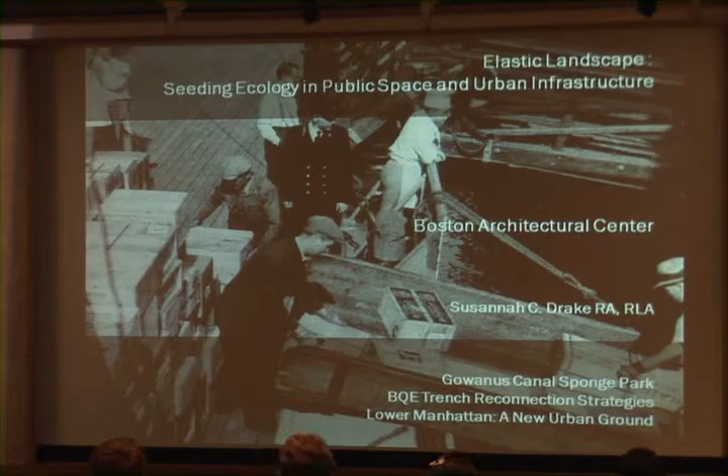So my talk today, as you said, is called Elastic Landscape, Seeding Ecology in Public Space and Urban Infrastructure. And it will be an overview of some concepts and then a focused exploration of three projects that we're working on or have worked on in the office. So really, we're looking at how cities that were designed for exchange need to change in their morphology, or in the morphology of the edge, now, given that trade is no longer happening in the same way along that edge.

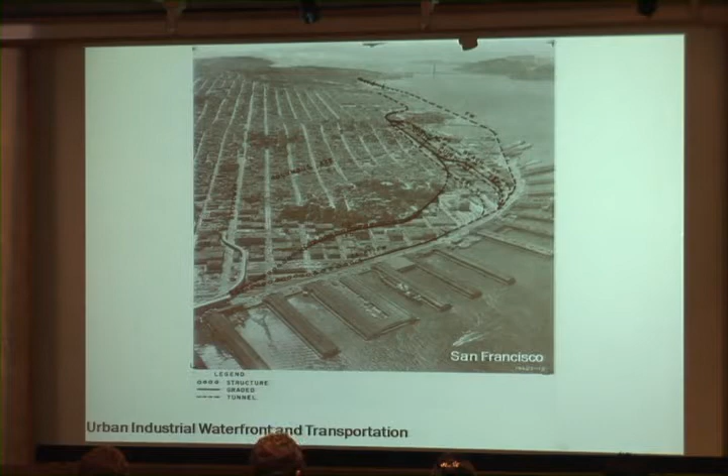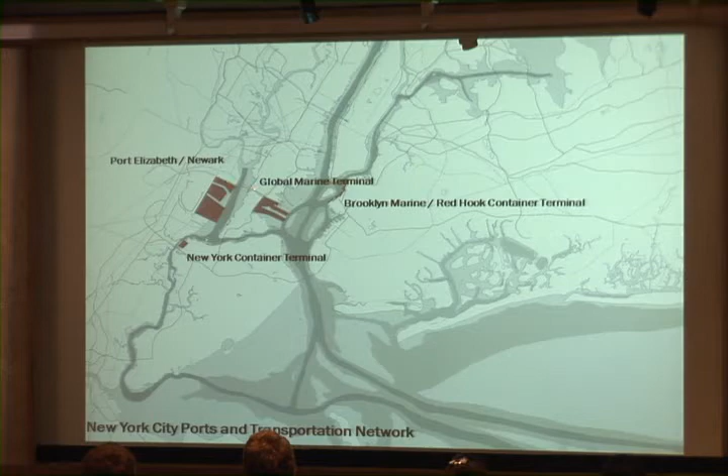With the move to containerized shipping, the need for storage space and space for gantry cranes and need for transportation, really the idea of having shipping happen in urban centers is no longer a reality. And so there's actually a potential opportunity for the use of this space that used to be used as this place of exchange of goods. So in New York City, you can see the potential impact, where it used to be that this exchange was happening all along the edges of Manhattan and Brooklyn, and now the shipping ports are actually out in New Jersey, with a little bit still happening within the city limits.

So ecological systems exist at a very broad scale in space and time, and the impact of urbanization looks pretty light from this perspective. But when you zoom in to the tighter urban scale, you can see that we've had a tremendous impact on the natural environment. And so my work is actually starting to think about how we might improve these situations.

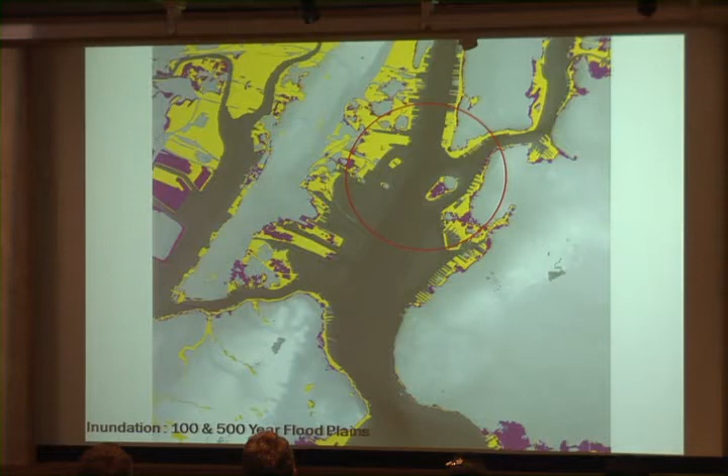So it's interesting to look at the shoreline or the historic water, actually really sort of wetland patterns of New York City, and then also start to compare those to some of the flood projection inundation zones that are suggested with sea level rise and climate change issues.

One of the things that has happened with this industrial development is that we've created these hardened edges, and we've also created these sewer outfalls from the upland areas. And you can see with some of the sea level rise projections that some of these sewer outfalls are actually going to be below extreme high tide levels, and that this hard edge really has to take the full force of a wave that's coming in. So there's no space for it to dissipate on the edge of the city.

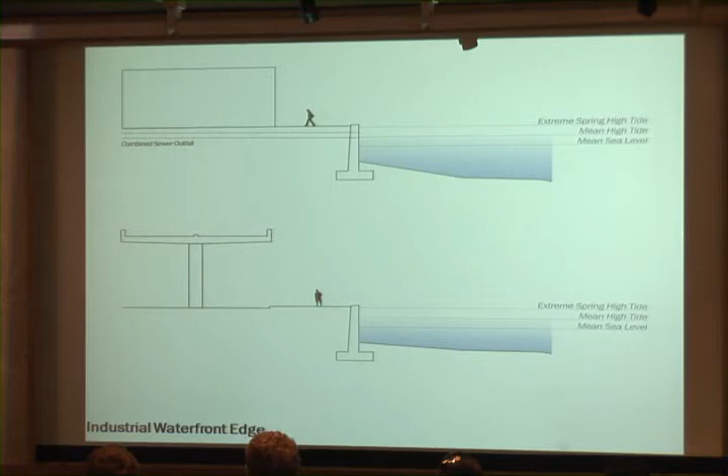So in an ecological condition, you really have a broad expanse of land that can absorb that force and also can absorb the water, right? So the plants are going to absorb it, but then also the angled cross section takes the action out of the wave, right? So that the force isn't going to hit the city as hard.

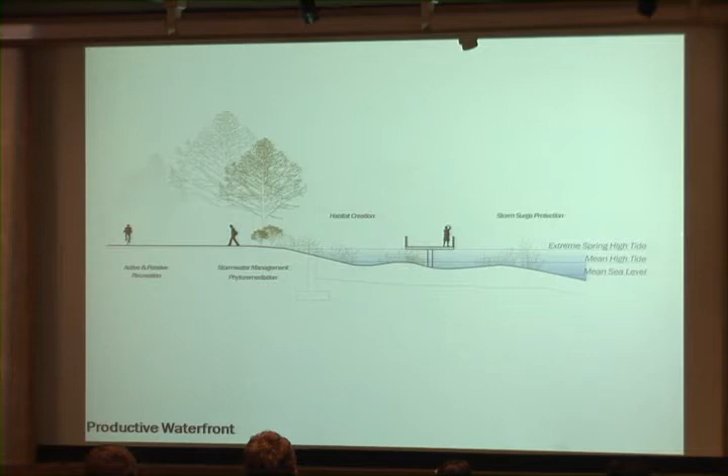So what we're proposing, this is a pretty simple example, but an idea of how we might add passive and active recreation that can absorb some of those forces. Maybe in some places we create places where you can actually get out over the water, but really a sort of thicker edge at that margin. So with that in mind, I want to talk about a couple of projects.

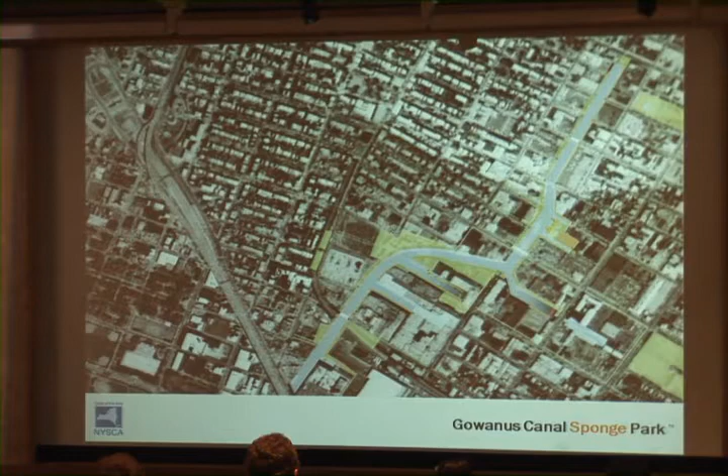This is the Gowanus Canal Sponge Park. We were asked by the Gowanus Canal Conservancy to come up with an open space system around the Gowanus Canal, and it's an old industrial neighborhood, and we knew that we were backed by the Gowanus Canal Conservancy, and that we were going to be doing lots of community presentations. We needed lots of community buy-in.

So we thought, well, how are we going to convince a community group that they should put a lot of swamps in their neighborhood? Or wetlands. And so we thought, well, wetlands act like sponges to absorb the water. So why don't we call it a sponge park? And that idea was born.

Now, part of the motivation for doing this is that New York has a combined sewer system. And in dry weather, the sewage from domestic and commercial sources just goes into the sewage treatment plants. But when you have even a 1/20th of an inch of rain, the sanitary sewage combines with the stormwater, and you get these overflows into the harbor.

And on average, we have about 400 million gallons of this combined effluent going into the harbor every week. So it's a very big problem. And the Department of Environmental Protection is actually getting fined by the EPA because of Clean Water Act issues in relation to this. So they're actually on the case and doing a lot of work to add these green infrastructure systems to the city. And that work, I think, has happened in part because of some of these projects, mine and work by other landscape architects in the city.

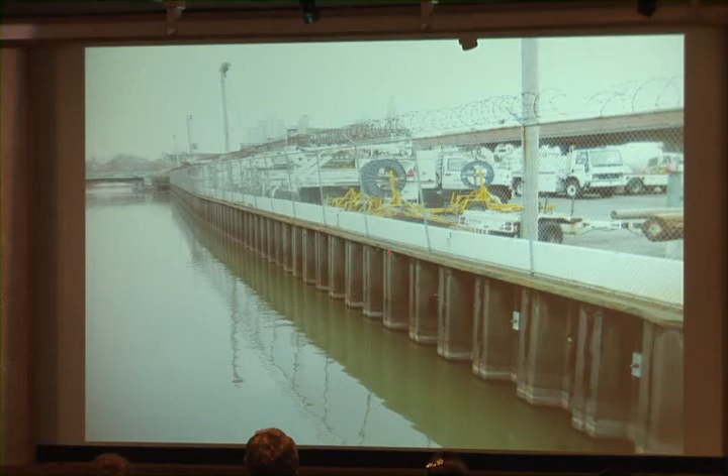So the Gowanus Canal can be a very beautiful water body, as you can see, although this is a baffle to hold back some nasty things. But the edge is somewhat deteriorated, and there's a lot of industrial uses along that edge, and non-waterfront dependent uses. So this is the boathouse for the Gowanus Dredgers, which is a boating club that uses it as their access, and you can see how badly degraded this area is.

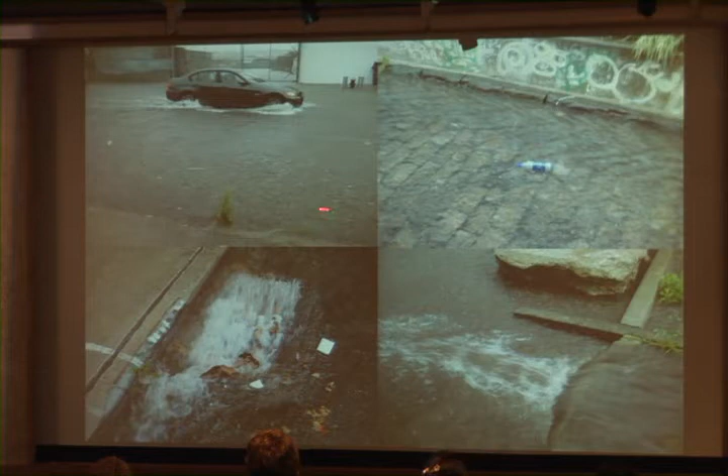And then the other issue is that we have all this stormwater. The streets are impervious, and all this water flows over the streets and collects with it all of this oil and garbage, and all of that ends up in the street ends. And here you can see what's behind the baffle. And you end up with these muddy street ends.

So what we did was we sort of took apart the problem. And in an urban setting, there really historically wasn't a lot of thought about the watershed, like the high points, because you just don't think that way because it's not really a natural system.

You sort of think of, okay, the water's going to go into the storm drain, and that's the way it works because that's the way cities work. But we thought, well, gosh, let's think about the natural system. So we compared the watershed, the high points, with the sewer shed, and it was sort of interesting to see how they almost correlated, but not quite, because some was jurisdictional and some was natural.

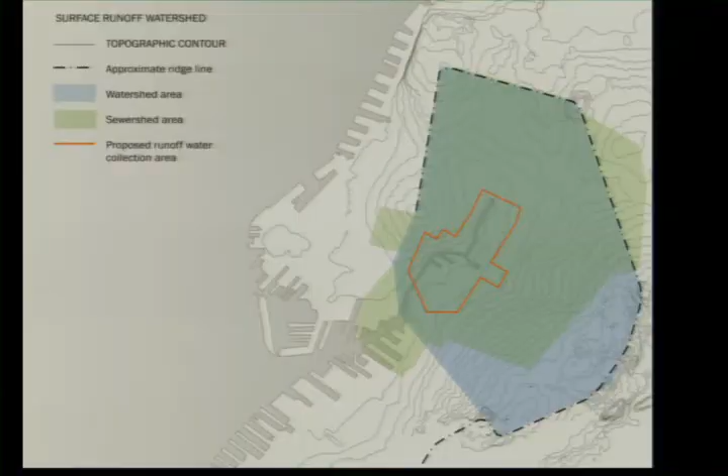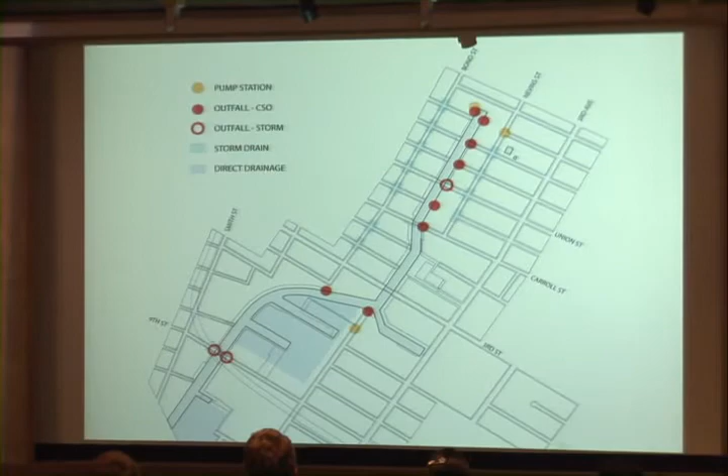And then we looked at the area where we actually could operate, and we calculated the amount of open space that we would need to absorb the surface water runoff for that catchment area. We mapped the location of the sewer outfalls and the storm drains and the direct drainage, and then we presented this notion of this sponge park that would absorb this surface water. And our idea was that we could block the storm drains and take that water and put it to more productive use. So we started to sort of pull apart the problem and analyze it.

And so we looked at the hydrology, the ecology, the land use, and the cultural preservation, and looked at how those issues related to maintenance and the ownership and so the contamination, how that leads to poor animal habitat, and really the relationship between the street runoff and the CSOs. And then we also looked at how to manage solid waste and trash, how to start to think about working on some of these contaminants.

There are volatile organic compounds within the soil. There's lead, there's cyanide. There are many awful things within this soil, in part from the runoff and in part because of all the industrial uses that happened there. There's also really limited public access, and there's some little treasures on the site. There's some great park space, but with limited access or limited connectivity. And then there's also a Revolutionary War monument that no one knows about.

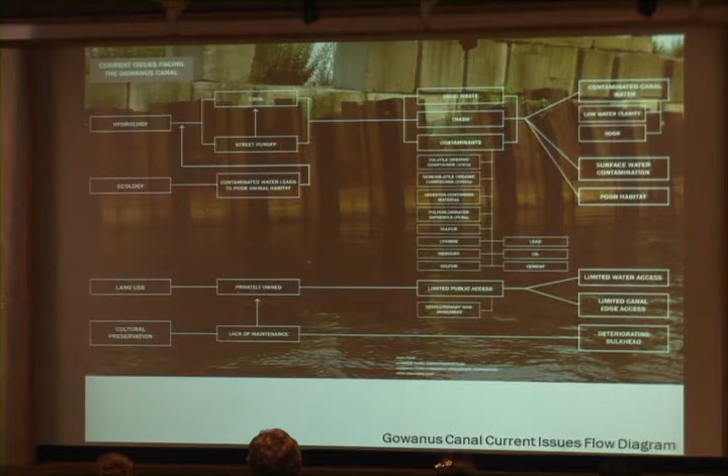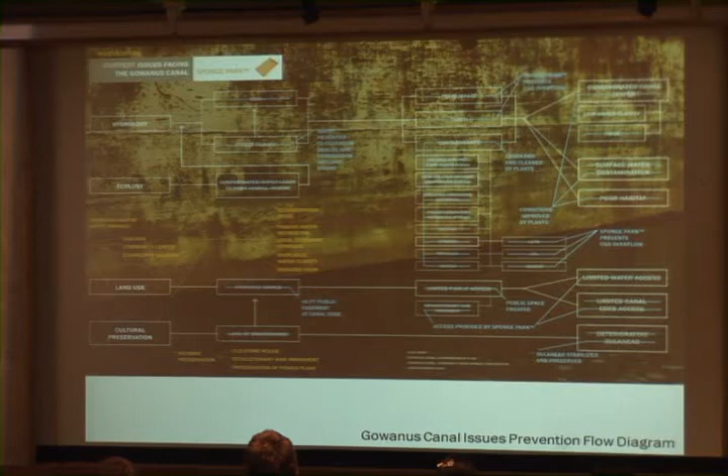So we thought that we could start to actually address some of these issues in the sponge park and improve habitat, add community programming, start to think about how we might preserve some of the historic assets, really instill neighborhood pride, get people to really take care of the neighborhood, and then also use plants and planting strategies and soil strategies that would help to break down and contain some of these toxins.

So we looked at some examples of some really smart landscape architects. This designer Kevin Robert Perry's work out in Portland, Oregon. We felt it was really important to show some built projects that we didn't have at the time that were successful. And Portland was such a great model, and as it's turned out, it was a really great model because our new director of sustainability for the city is from Portland, David Bragdon.

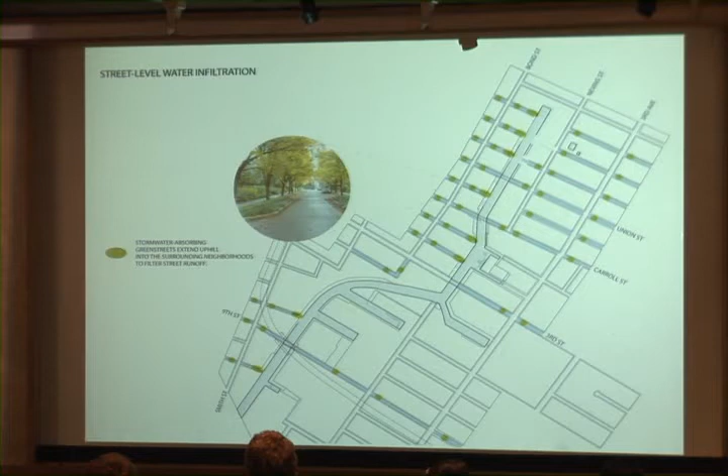And we looked at the places where these kinds of strategies could exist. We actually mapped where all the driveways were. We went out and checked the survey to see where the hydrants were and see if there were inconsistencies. Because there's a lot of development that's kind of rogue development. There are fences where there aren't supposed to be fences, and there are places that have been privatized that really aren't supposed to be. So we didn't really want to propose something that was going to get us killed in Gowanus, or thrown into the Gowanus.

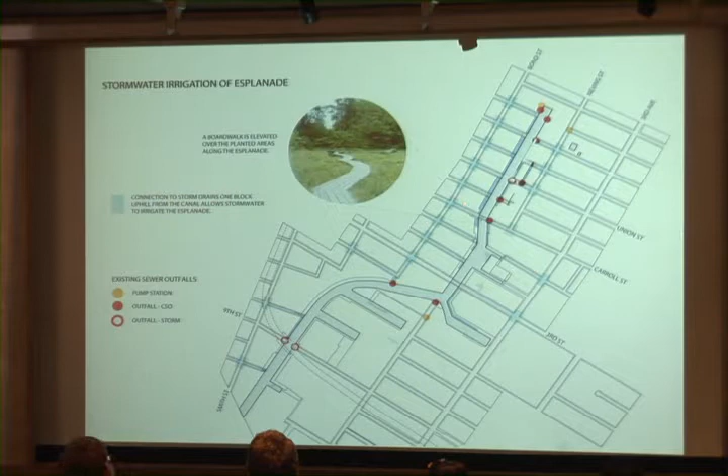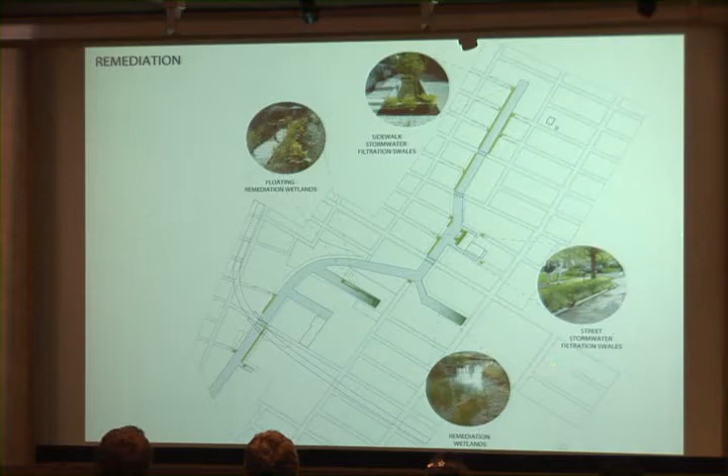And then we looked at the potential for this stormwater irrigation esplanade, that there could be a kind of pathway system that existed along that edge. In an average rainfall, basically the filtration swales will take most of the runoff. But when there's a heavier rain, our thought was that we could connect to the storm drains and redirect that water down to the street ends. So we looked at some different models for the remediation, the floating remediation wetlands, sidewalk stormwater filtration swales, street stormwater filtration swales, and remediation wetlands, and thought about where those ideas could be deployed.

And then also looked at different plant communities that could exist with different levels of inundation. So actually these can get really dry, because if we have periodic droughts, these would be more upland, in the more upland areas. And then these can withstand periodic inundation. And you can see these little indicators of their productive capacity to process PCBs and heavy metals as well. And then also looked at plants that could stay wet most of the time, but could have wet feet.

And then one of the things that was interesting is that the area was undergoing a rezoning at the time. So we went and we presented this diagram to city planning and convinced them that really, a 20-foot setback for all future development from the edge of the water wasn't enough, and that they should really think about a 40-foot setback, because look at all the great things that can happen in a 40-foot setback.

And we also made the argument that the Gowanus Canal area was historically fairly low industrial, right? And that the idea of that open water and that low profile should continue. And so we actually managed to convince them to have a 40-foot setback from the edge, which was very helpful to us in grabbing more open space.

But there are also a number of cases where the buildings go all the way up to the water's edge, and that makes sense because it was a place where goods were exchanged at that water's edge. Those things are no longer happening, but the condition still exists, and the buildings haven't been redeveloped, and we didn't want that to kill the plan.

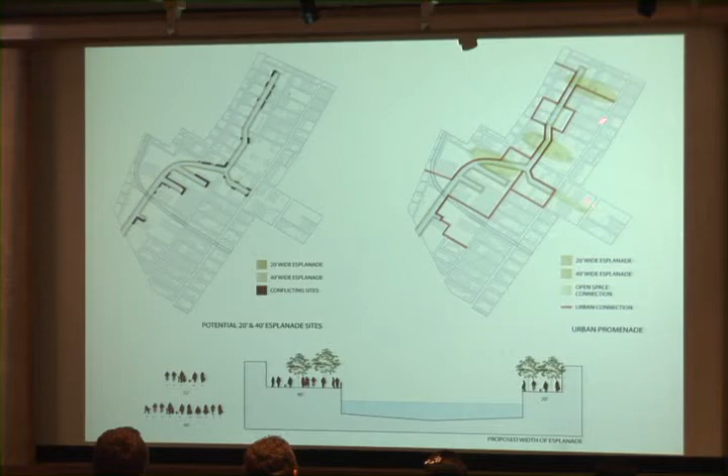And we also thought it was actually really interesting because it meant you could have a promenade, this idea of the urban promenade, a path that at some points is along the water's edge, but sometimes loops back into the community. So we thought that was actually more interesting. And there were places where we could make very strong connections to existing open spaces. We thought that was a really important element as well, because there's some great park space like over here and over here, but they're small.

We phased the plan. We looked at places where we could develop first street ends and add street trees in some of these stormwater swales. We also wanted to show places where development was already happening and how our plan might incorporate into those plans. And we met with a lot of the landscape architects and architects working on these developments and said, hey, can you think about using this strategy? Because our feeling was this is a master plan. It's not our design, and we're not trying to be proprietary about it at all.

We're just saying let's make this area more functional, and here's an outline of opportunities where this kind of work might happen. But then you can see how it fills out over time, with the ultimate vision being closer to our idea of this urban promenade with these spaces all being connected, and with a more maximized environmental productivity. And here you can see an image of what that would look like in axonometric.

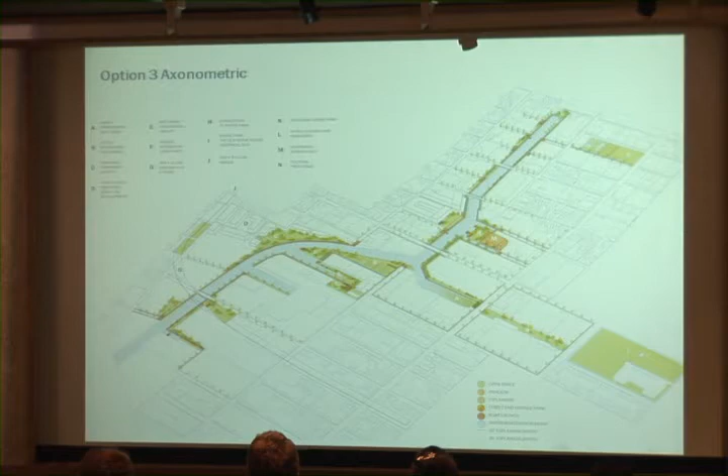Now, in the middle of all of this, the site was declared a Superfund, which was challenging because it meant all the development stopped, and we weren't sure if the project was going to go ahead at all, and everything was in question. But what happened for us was we actually made friends with the Superfund people and convinced them that there was a site that was actually okay for us to develop, and we applied for a grant, but I'll talk about that in a little bit.

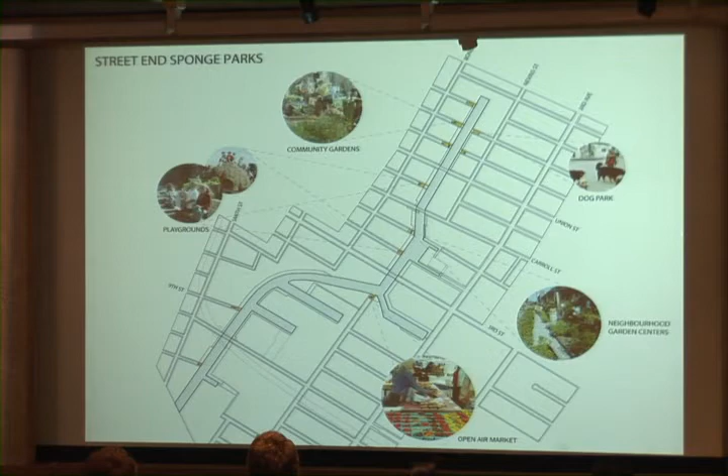This is an example of how the street ends might be programmed with community gardens, playgrounds, dog runs, neighborhood garden centers. Our idea for the esplanade was that there's a mixture of hardscape and softscape materials. There could be planted edges. Again, these floating remediation wetlands, cafes. The idea of having a canopy close to the water's edge was attractive to us as well. And then a maximizing of views.

We wanted to maintain the industrial character of the site, so we were looking at shipping containers, thinking about the material qualities of the industrial area, and then this is the Tate Modern, thinking about how this cable building might become something like that as a cultural space.

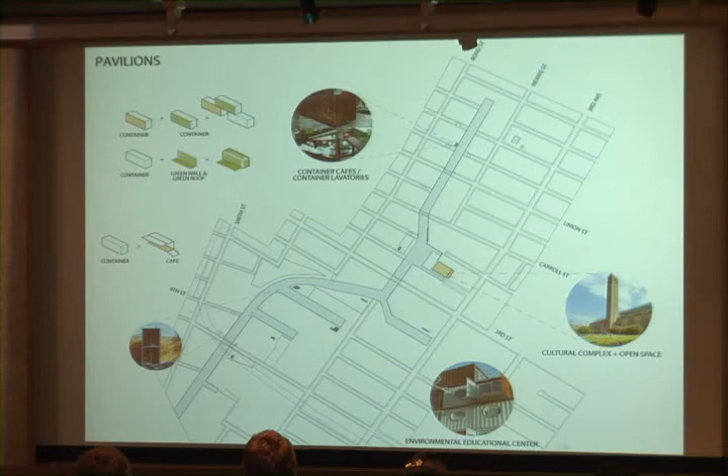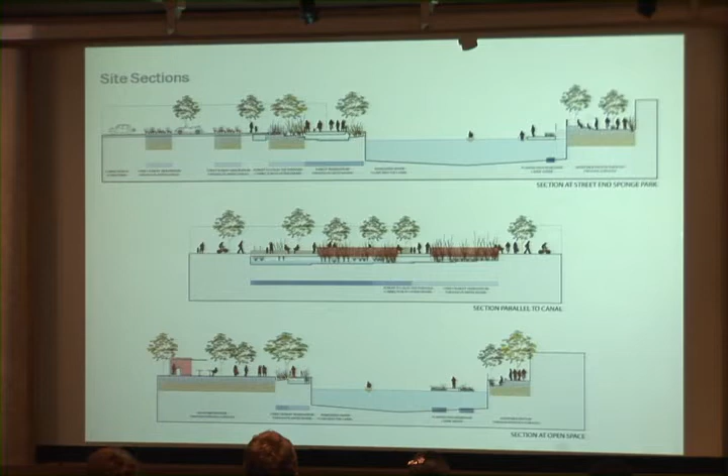And then we did a series of these section drawings that suggested the overlap of ecologies with program and how those things might use the same spaces in order to enhance the ecological function and the programmatic function, because we do have limited space. How the cafe spaces might relate to the waterfront, how we might shape these profiles, how we might even have these floating spaces or dock access spaces.

So here you can see how the planting strategy might work with the midland plants and the upland plants, and then the water-loving plants down along the edge, with the water flowing down to that edge.

So they're going to want to manage all the water that's coming off the road and into the storm drain, and also across with surface flow. The Department of Environmental Conservation, which is a state organization, actually handles the soil because it's a brownfield. So their regulations are ridiculous. Well, they're complicated.

And then the Army Corps actually handles the sediments that are underneath the canal. So you can see that it's just this incredible sort of tangle of agencies that are involved with these projects. And this is fairly typical. It's a little bit more complicated probably than some.

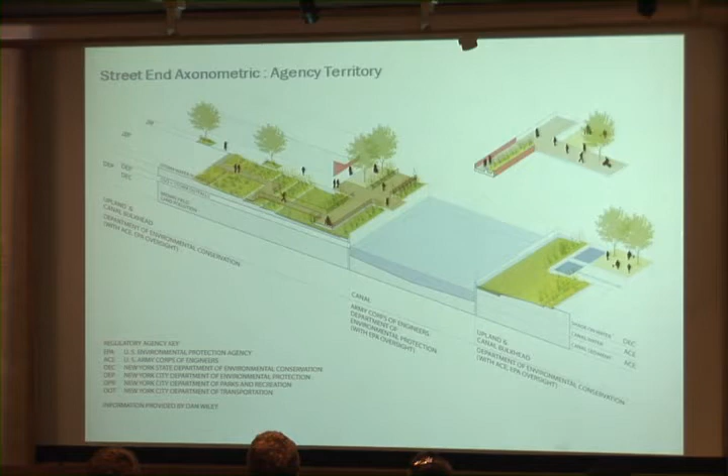Actually, and one other thing. The DEC controls the shade over the water, which also just seems like such a crazy thing. You think, oh yeah, I'll just cantilever that walkway to get around those buildings that are along the edge. No, not an option. So here you can see an idea of what the street end might look like.

Actually, and this one's interesting too, because we presented this at a community meeting, and the dredgers, who are the boat club, they kind of freaked out because we had a railing here, because we're thinking, okay, we don't want kids to fall in the water, so you put in a railing. And they said, but we can't get out of the water. You know, if a bigger boat comes up, we're not going to be able to escape. So we took the railing off, and you can do that in the master plan, and whatever designer does that street end will have to actually resolve that issue, because it's complicated.

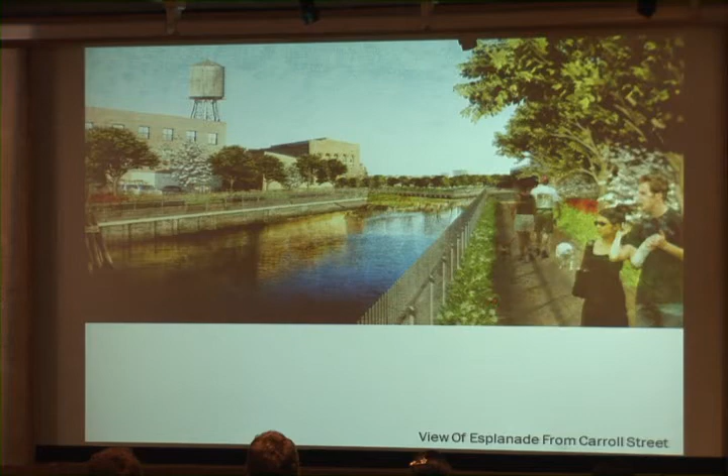So here you can see a view looking south. That's that industrial building that I talked about as a potential cultural facility, and this wetland in one of the turning basins, and the esplanade. And then a view looking north. This is downtown Brooklyn from Carroll Street.

And then one of our major backers of the project was Nydia Velázquez. She's our congresswoman, and she appropriated money through the EPA. And she had never been able to get an interiors appropriation through the EPA. But because this actually indirectly managed sewage, she managed to get money to the site. But her husband apparently proposed to her along the Gowanus Canal, so we did this rendering in her honor.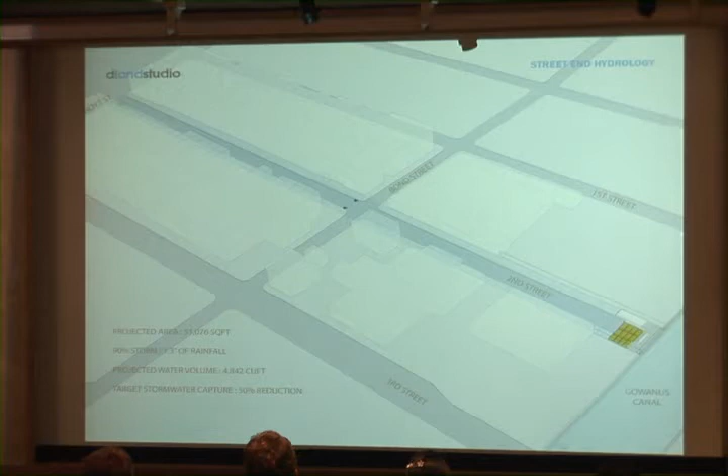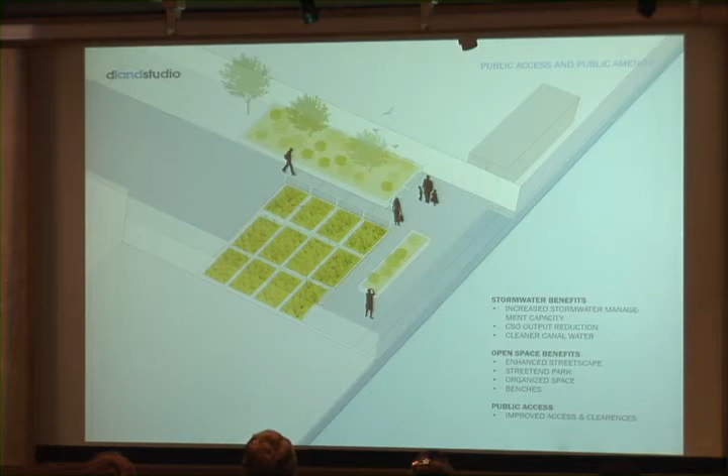We're trying to make it a modular system so that it can be used in other places around the canal and around the city. And you can see how that would work. This is really in design development at this point, although it's going to have to go into really rapid design development because we're supposed to be in construction in the fall. But here you can see the unitized system and what that would look like. So that is the Gowanus Canal Sponge Park. And now I'm going to talk to you about some of our other infrastructure work.

This project is called the BQ Green Reconnection Strategies for Brownstone Brooklyn. When I started my practice, I really wanted to do large-scale infrastructure projects and campus planning, and I thought, well, nobody's going to hire me to do that without a track record. And I guess a lot of people will take the work that they did from other firms and say, well, I was the project leader on that.

And I thought, well, okay, I could do that, but it's a team, and how do you really define your role? And so I thought, well, I'm just going to apply for some grants. And I applied for the grants that you mentioned. And the first one that I got was actually from NYSCA to explore this site.

And I want to read this. This is a historical rendering of the BQE as it was proposed.

And he, Robert Moses, spent a lot of time looking down at it, watching the cranes and derricks and earth-moving machines that looked like toys far below him, moving about in the giant trench being cut mile after mile after mile of densely packed houses, a big black figure against the sunset in the late afternoon, like a giant gazing down at the giant road he was molding.

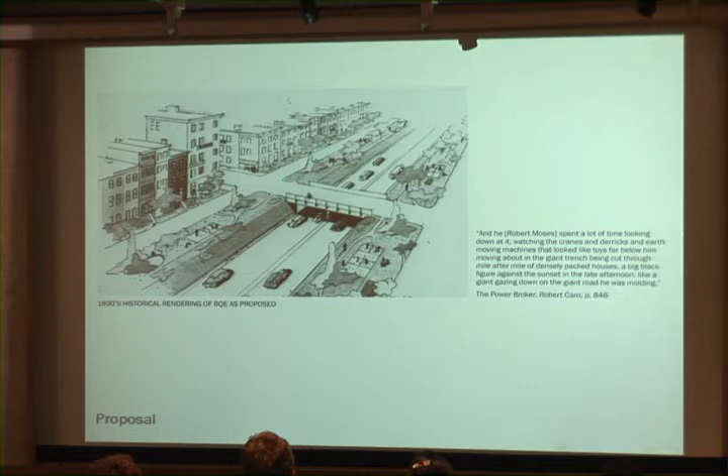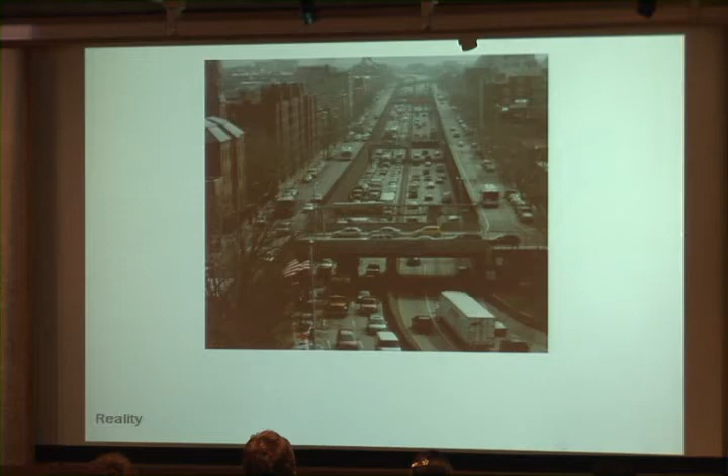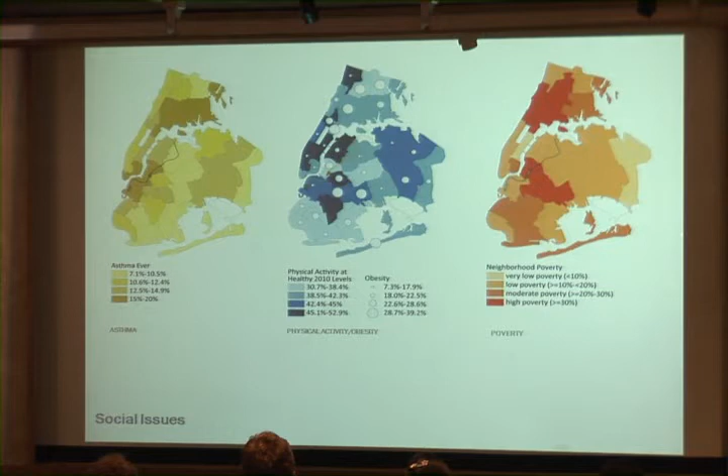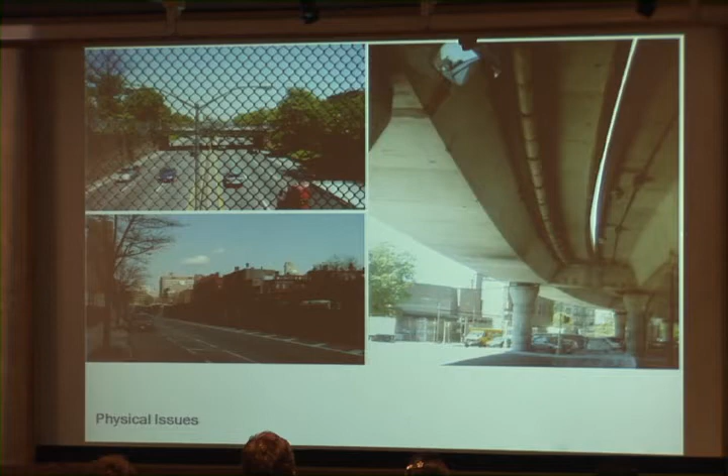So we looked at some of the social issues, the relationship of the trench to asthma rates and physical activity and obesity and poverty, just to see if there were correlations. And then also looked at some of the physical issues in relation to the trench, these raised highways, the fences, and just the general conditions.

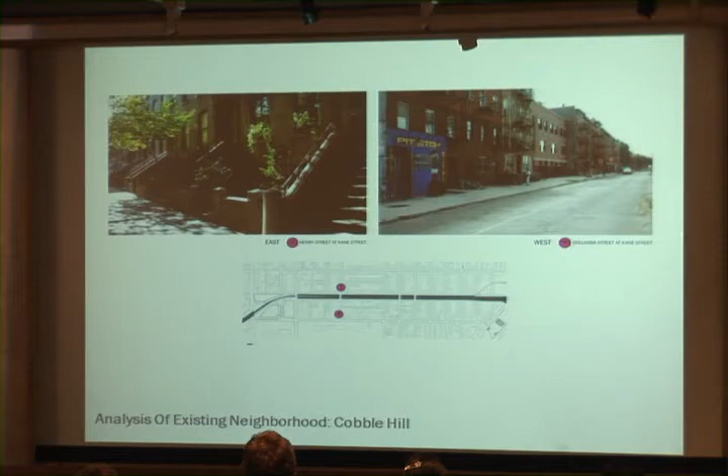So if you look at the existing neighborhoods, in Cobble Hill, you have multi-million-dollar houses on one side of the trench, and then less than multi-million-dollar properties on the other side. The real estate values here are much lower than over here. It's interesting how the trench can actually also cause these sort of territorial boundaries.

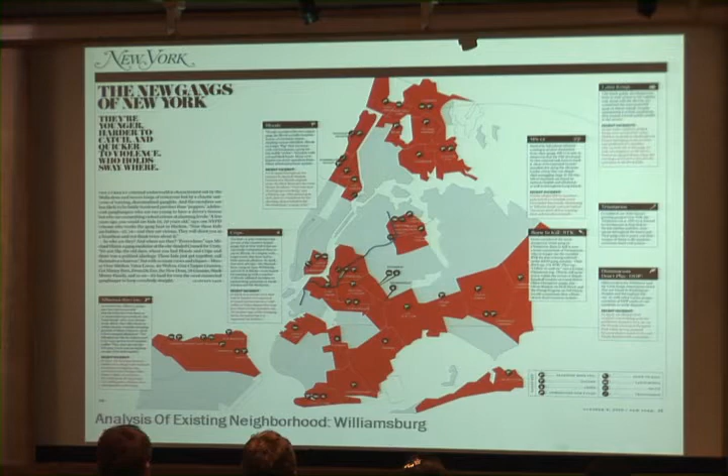We're working on a site in Williamsburg now where it's a Latino community generally, but you have the Puerto Rican community on one side and the Dominican community on the other side, and there's this clash, and there's very clear territorial boundaries of the gangs on either side. So we're looking at whether, if we are able to do some strategies to bring the sides together, we can at least address that a little bit, but we'll see what happens.

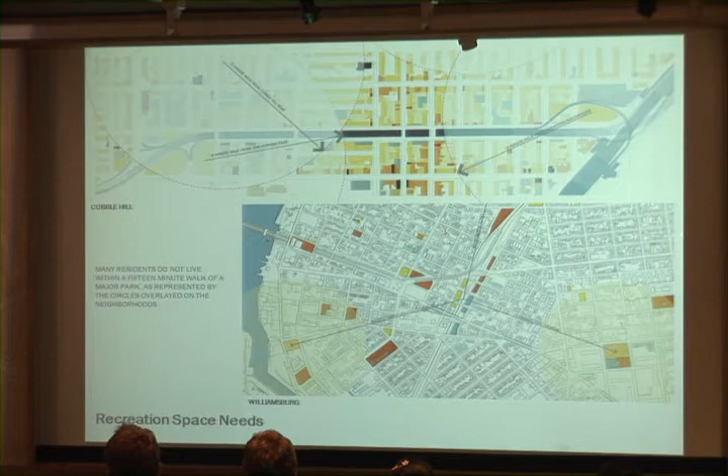So we looked at some of the open space issues in relation to PlaNYC, which is the mayor's new guidelines for open space. This is a 15-minute walk from the closest park, and you can see how there's this space here that really isn't served by any kind of park space. Now, our Williamsburg site is served for park space, but there isn't a whole lot of active recreation space, and that's the space that would be used by the middle school kids, who would be the kids more susceptible to getting involved in the gangs.

So in working with the community, it's helpful to have some sort of device for recording decision-making along the way. So we came up with the idea of this productive matrix with environmental benefits and recreation, vehicular circulation, health and safety, pedestrian circulation, and development, and looked at how, when you're doing any project in a city, you can't say there's direct competition for these issues, but all of these issues have a kind of weight in your decision making, and different groups are going to have clearly different views on maximizing any one of these things.

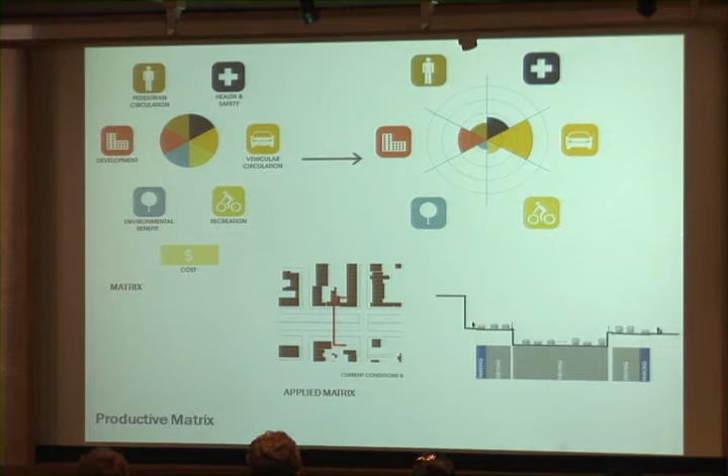And with the BQE, the maximized factor was only the car, and so we thought, well, that's a problem, and that's something that we can work on.

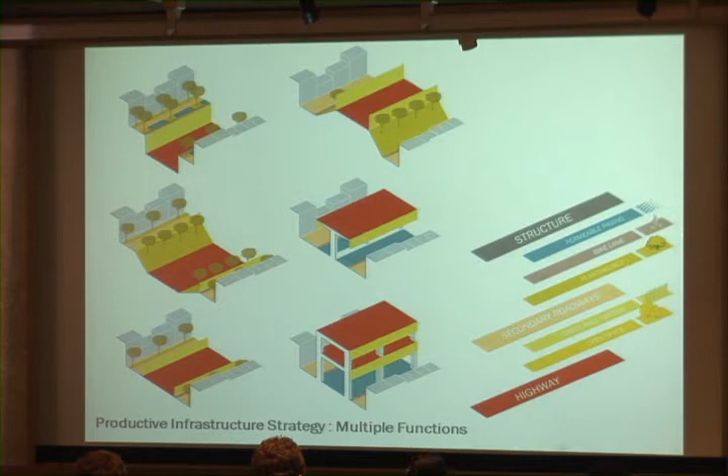So we also wanted to break it down and think about the existing conditions, like the sort of structure of this infrastructural barrier, and what the sort of functions were of the structure, the service roadways, and the highway, and then think about how we might add additional layers, either permeable paving, bike lanes, planting beds, the green wall systems, or just additional open space, and how that might occur sectionally in different options.

So this diagram is actually another really important one, and you can see we rely heavily on diagrams. Diagrams are your friend. We used some U.S. Forest Service data to basically calculate the value of our open space strategies. And this drawing actually helped to secure a local match for federal money that was coming in to do work on this project. So we calculated that we could generate $250,000 worth of oxygen,

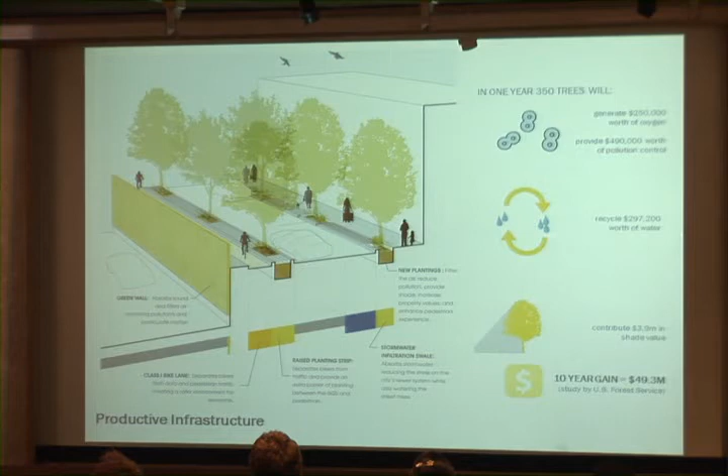$400,000 of pollution control, recycle almost $300,000 worth of water, and contribute $4 million in shade value, for a 10-year gain of almost $50 million. So that's a benefit to the city. It's a benefit to our community, but it's not something that any one person gets. But the city is starting to think more about the value of some of these broader ecological issues.

So the other thing that's sort of interesting is that the city had put a lot of energy into this site with these federal monies, probably because it was a really good development area. But if you look at the median household income here, it's $80,000 with a population of 104,000. Our northern site in Williamsburg has a population of 160,000 and a median income of half as much. But our cost here, we're only doing a couple blocks, is only $100 million, versus we estimated it would be about $1 billion to do full capping of the other trench project.

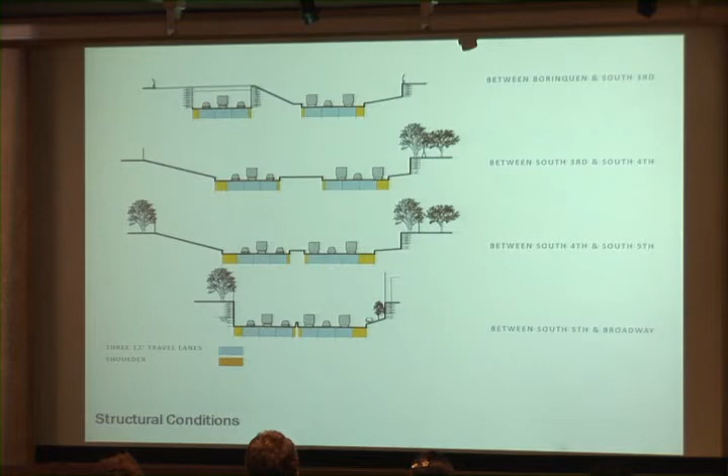So this is the BQ Green in Williamsburg, and this is the cross section of the street. It varies from block to block, and that's a really important thing because the highway, the clearance of the trucks, it wasn't designed for federal highway standards, and so we can't make the deck very thick. And so we needed to have it so that the structure could touch down in the middle. So we determined that there were 3 blocks where it was actually feasible to do the span with a thin deck, and then there was 1 block where it just really wasn't going to be cost effective to do that. So that affected how we planned the project.

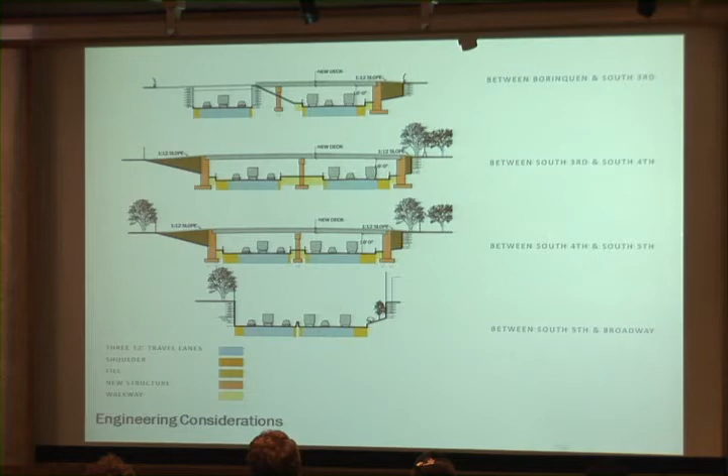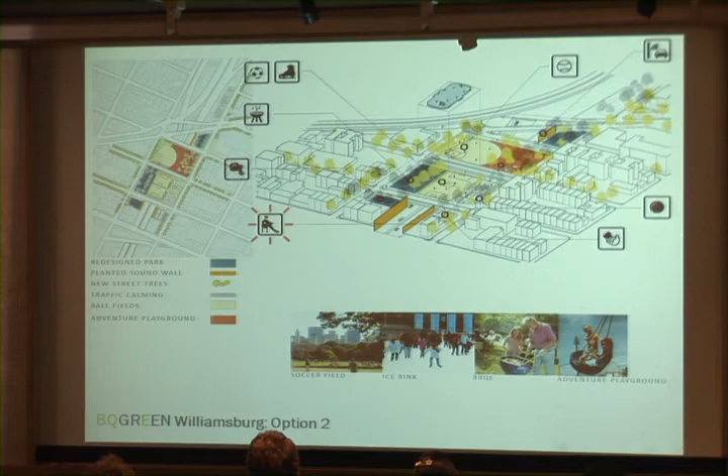So we looked at capping these 2 blocks. Actually, it's a phased plan. So we started with our option 1, which was basically improving the edges, and then looked at the capping of the 2 blocks in the middle, because any project in New York City of this scale is going to take 20 or 30 years anyway. So with the capped version, we were able to add a baseball field and a soccer pitch. And then in our third sort of stage, we also added a community center.

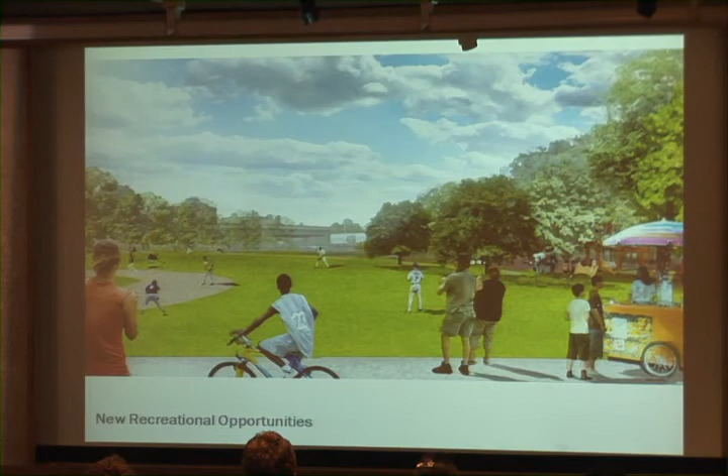So you can see the before and then the after. You can barely tell where you are anymore. And then here, this passively used seating area, you can see it's very passive. There's no one there. That would turn into a barbecue area for the community with the soccer field in the background. And then this minimally used handball court would become this recreation center, really a place that could be used more actively by the community.

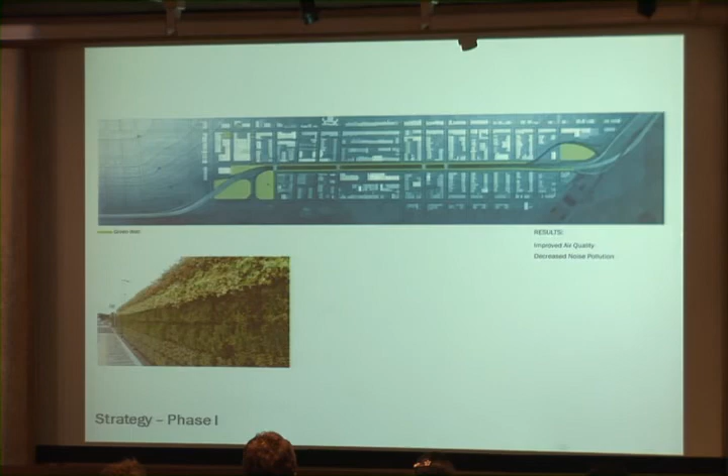In Cobble Hill, this is the existing condition. Here we went back to this wheel strategy, and this is the existing condition. If we look at adding a green wall to this, you can see the phase 1 strategy, this is the before and the after. Here, this is the existing condition of the wheel. You can see the wheel is starting to fill out.

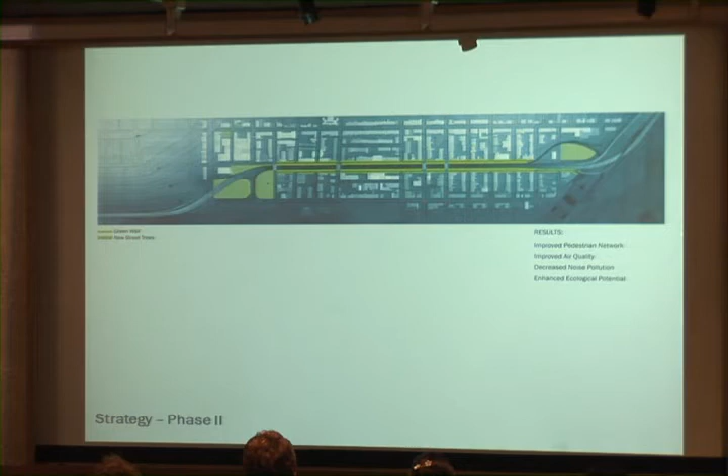In this case, we're adding more of the street trees, and this is our $50 million gain by just adding the street trees and the green wall. Actually, just adding the street trees will do it. And this is what that would potentially look like if the trees are on steroids in a Photoshop world. And then here in this third condition with the decking, you can see that the wheel starts to fill out.

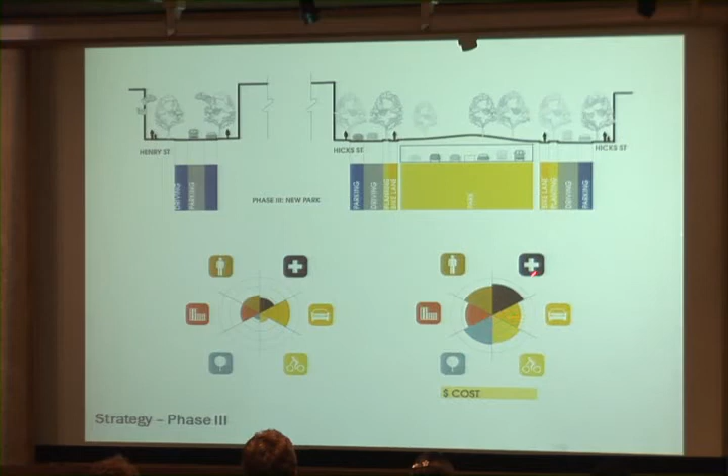And the traffic is similar to what it was, but it's a healthier environment and it's better for people, and the development zones can increase as well. One of the notions that I had was that you could have this kind of modified Jane Jacobs where you keep the existing low-rise character in most places, but just upzone the corners. So it's kind of Jane and Robert duking it out a little bit.

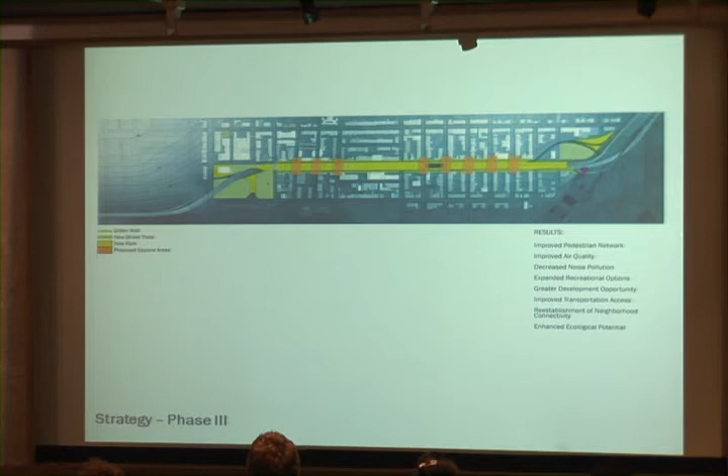So here's the before and then the after. This site actually exists adjacent to Brooklyn Bridge Park, so it could become this really sort of fluid network for the area leading down to Red Hook.

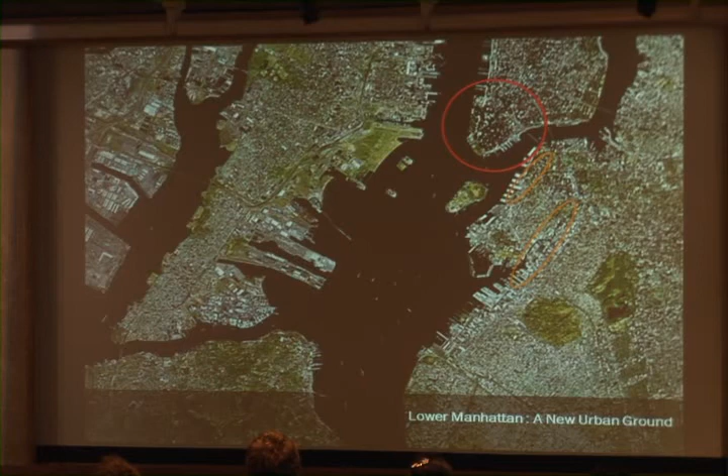And then this final project that I'm going to talk about, some of you may have visited the MoMA exhibit last year, but it's Lower Manhattan, a new urban ground. We were asked to participate in basically a design charrette by the Museum of Modern Art, and this is our model of our site.

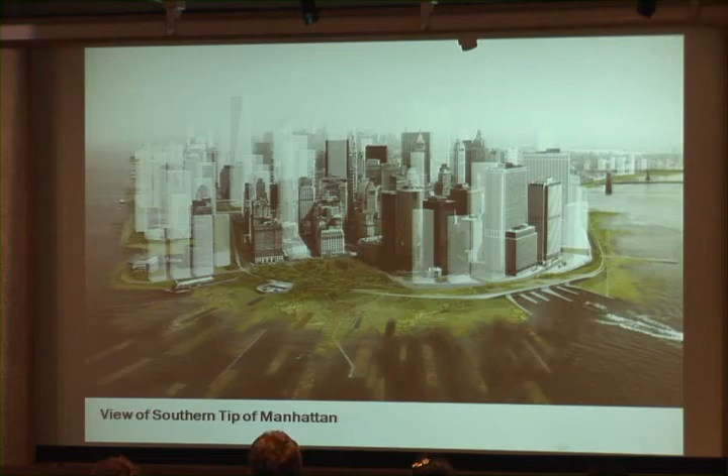The project examined the impacts of climate change and sea level rise in New York Harbor. And 5 design teams were selected to develop work in studios out at PS1. Matthew Baird, SCAPE, nArchitects, and the ARO and dlandstudio team were all selected. And really what this map is showing is that with rapid ice cap melt, scientists project a 6-foot sea level rise in the next 100 years.

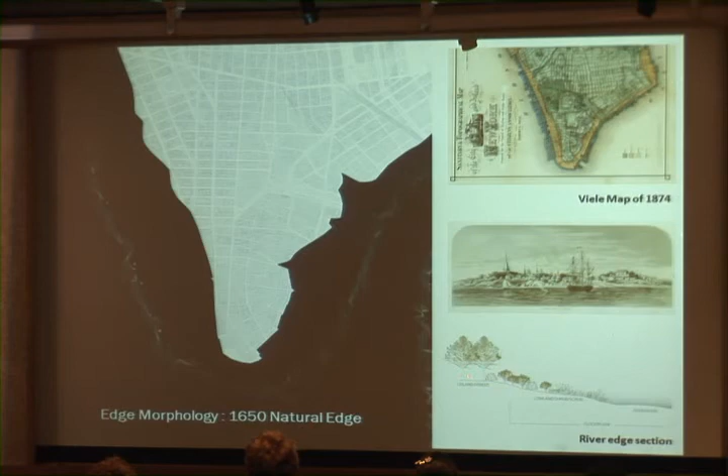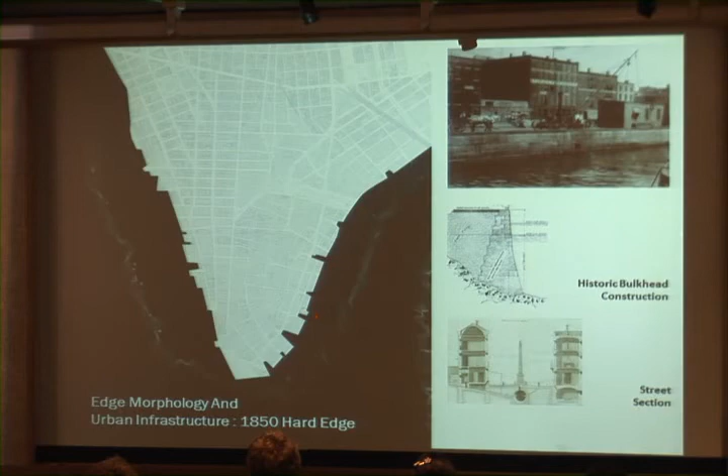But you can see that by 1850, these hard edges began to emerge with these slips to facilitate trade. And then by 1960, you ended up with these finger piers sticking out from that hardened bulkhead. So that same bulkhead is back here, but the slips all got filled in as well.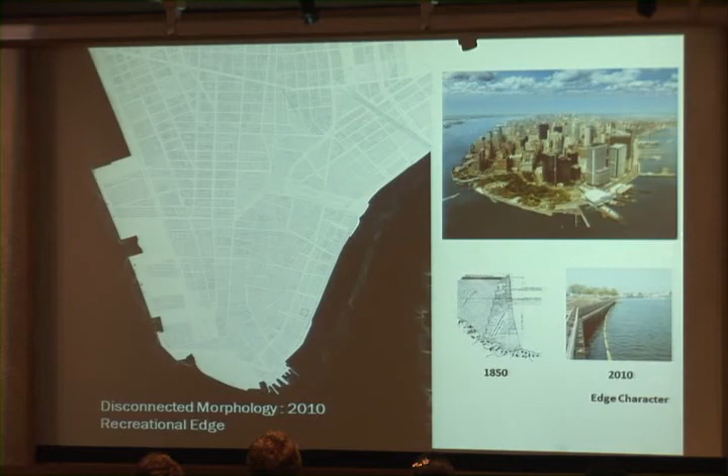So the thing to notice here, too, is that there's an alignment of the mercantile edge with the internal street edge, which kind of goes away with this disconnected morphology of 2010 with this recreational edge. So we've created a very different kind of system than what was historically there for shipping.

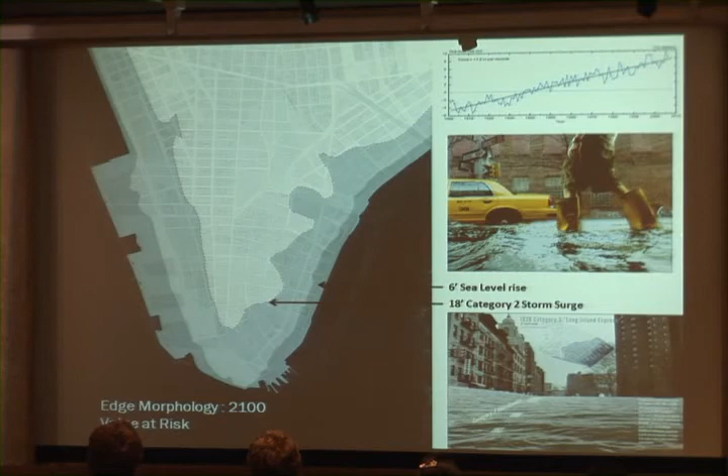But you can see that this line is pretty interesting because this line is pretty much that 1650 line, and we've created all this fill space that will potentially be constantly underwater, the darker blue, and then periodically flooded if we have a Category 2 storm surge. So we also have this condition of the combined sewer overflows that I mentioned before, and these are the location of those outflows. So those will all be underwater.

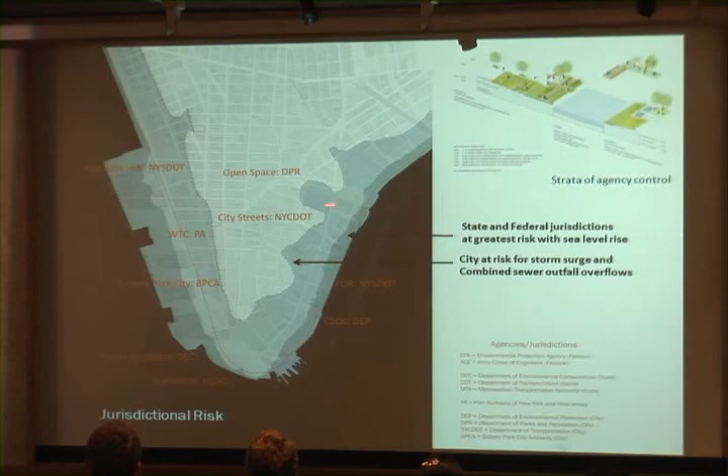So what we were trying to do is create a system where we're thinking about how to manage the fresh water, the CSO waters, the storm water coming from the sky, and then also how we manage the salt water coming from the ocean or from the bay. And again, it's a complicated system where there's lots of different jurisdictions that have to be managed.

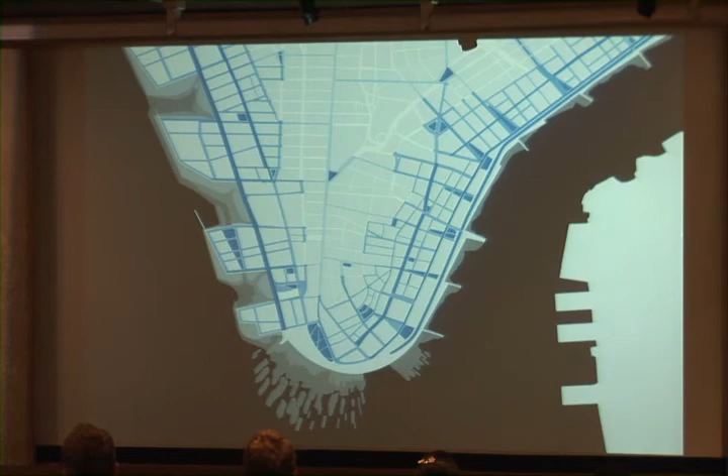So we really looked at a 2-part system. There's the upland sponge streets and the soft green edge: the edge system of public parks and freshwater wetlands and salt marshes. So within the island, the city streets offer an opportunity for new ecological infrastructure. The streets are redesigned for absorption, distribution, collection, and protection.

We designed this system of waterproof vaults. Basically, we took all the utilities out of the street and stuck them under the sidewalks with the idea that if you put them in vaults that could be accessed, you could then replace them as they became obsolete, and you wouldn't constantly be digging up the streets.

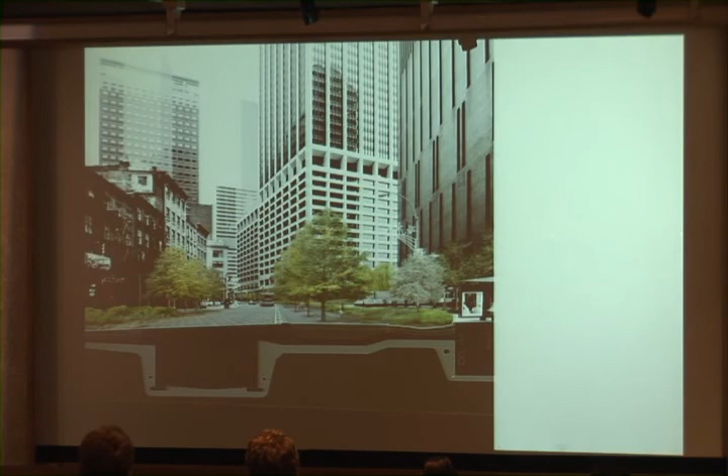And then you take all that street space and you actually make it absorbent so that it can take the surface water runoff. And we designed these different kinds of streets. Some of them were taking regular surface water runoff, and some of them were taking bigger flows from these flood conditions. So this is one of the streets that would be a collector street that would take a lot of that water. And here we're imagining new kinds of infrastructure systems that could work with this idea.

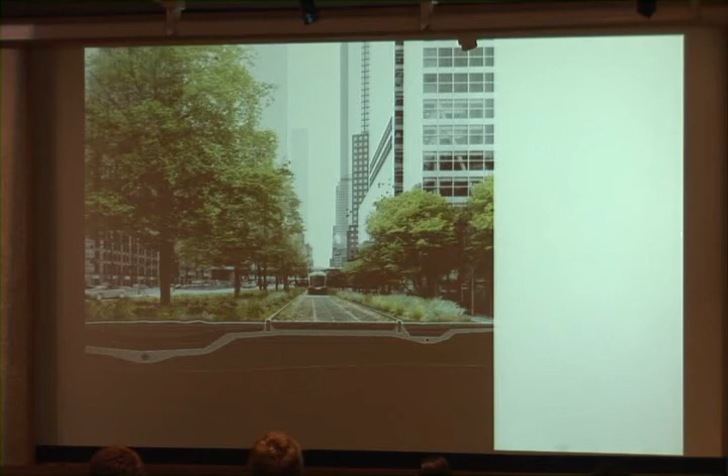We made a new hardened edge that was at a higher level, and then outboard from that created this new waterfront park space. We have these freshwater wetland spaces, and then saltwater wetlands. Now, it's not just green poché. Basically, we calculated all of the rainwater inputs that were coming into the system and then figured out how much open space we needed to absorb that water.

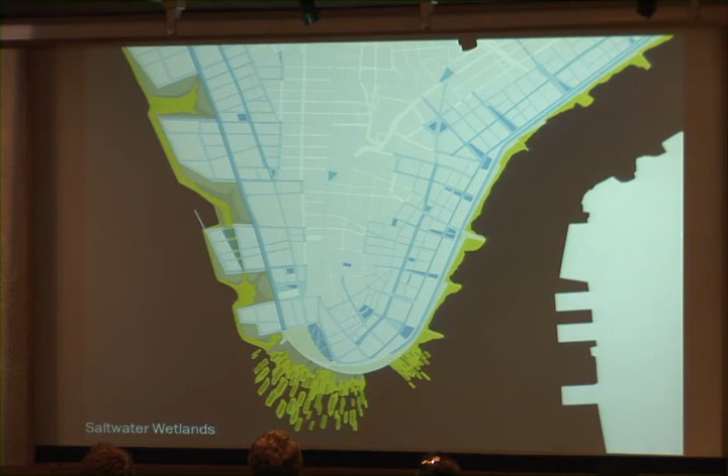So we have, I think, something like 450 acres of space, and we needed 80 acres of permeable ground in order to absorb the surface water runoff. So there's a rigor behind these fuzzy green edges. And this is the plan. So you can see how these edge conditions actually relate to these upland streets, and I'm going to go through some of the particular conditions walking around Manhattan, and then we'll break for questions, because I know we want to leave time for that.

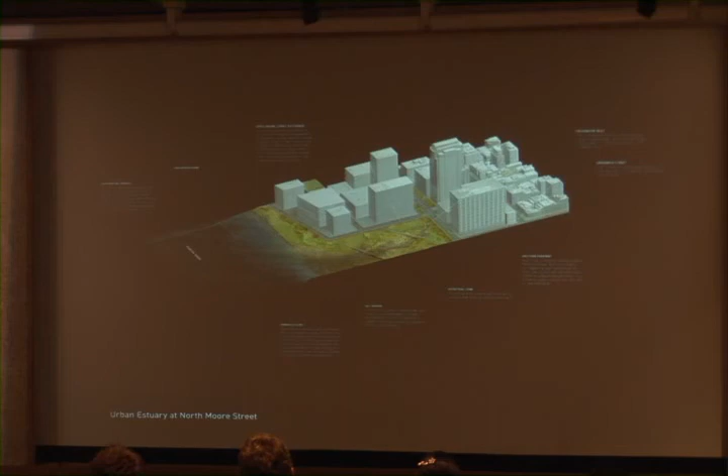So here, looking at the urban estuary at North Moore Street, you can see the combination of the upland wetland and the recreational space and the saltwater marshes. And it's interesting because at Battery Park City, the bathymetry, that's the underwater topography, drops off really steeply. So we really had to cut back into Battery Park City rather than building out further with these wetlands.

So here you can see the condition, again, at Battery Park City, the urban estuary at Liberty Street. Here we actually allowed the water to run through the city, so you'd have these different kinds of experiences of how nature and the urban condition can interact more productively.

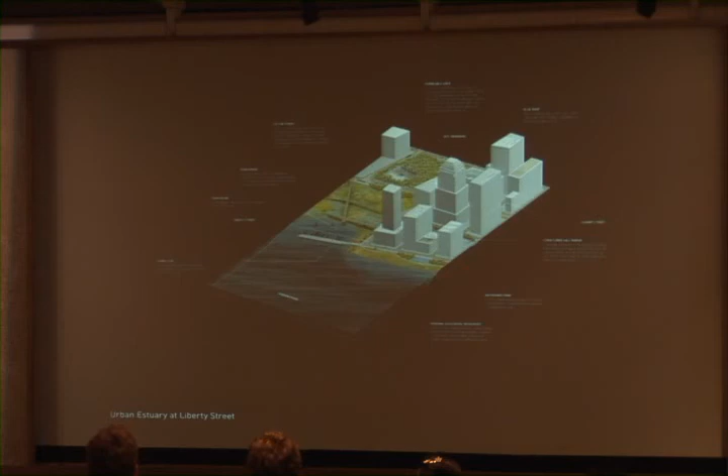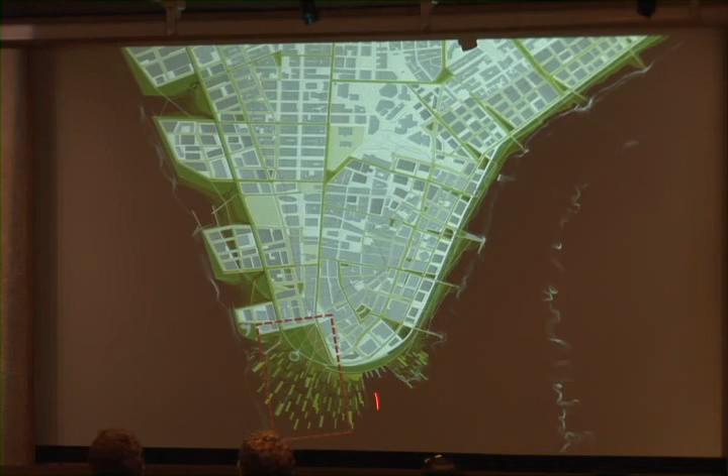And here we had the Battery Breakwater. We were thinking of using some of the dredge material that's taken out of the harbor yearly, or continually pretty much, and putting it into these geotextile sacks that could form islands. These would all morph over time. Right now they're pretty rectilinear, but with tides and with deposition patterns, they're going to turn into something very different, and it'll become this whole landscape of shallows that you could kayak through.

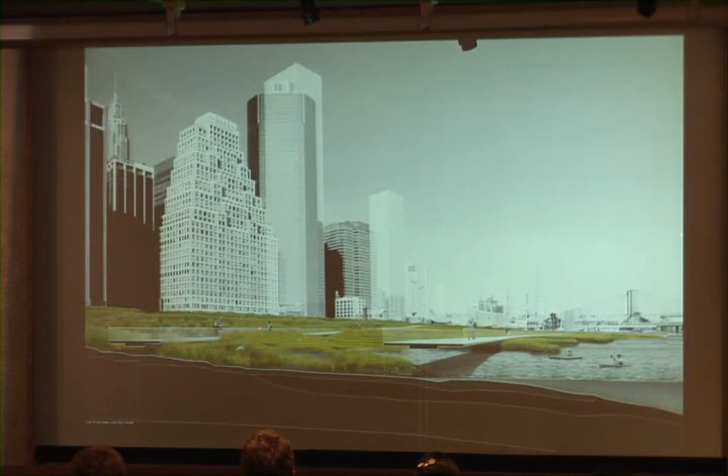And then over on the east side, the bathymetry is much more gentle, and we had the idea of having these pathways through the wetland spaces. And then we also designed this thing we called an urban esker at Fulton Street. An esker is a geologic formation, a deposition of a long snake-like mound that was formed when the glaciers receded. And actually it's funny because I think esker also means pathway in Gaelic. So there's this wonderful layering of meanings as well.

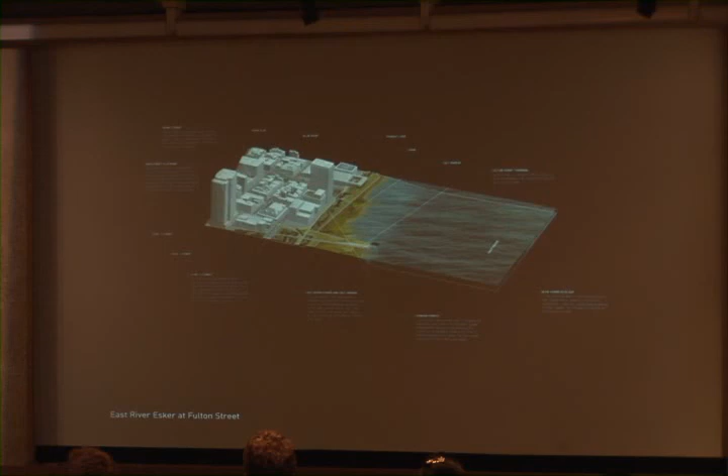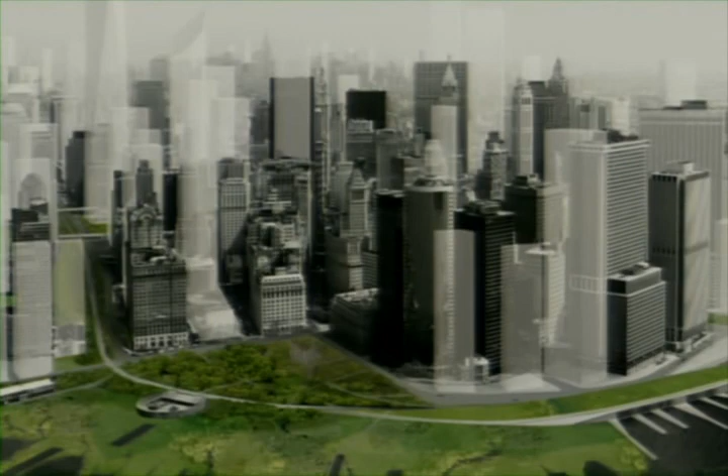And then there you have it. This is our plan of Lower Manhattan. We really wanted to create a vision where there was a completely new way of thinking about how the environment can interact with the urban condition. And with that, I'll open it up for questions.